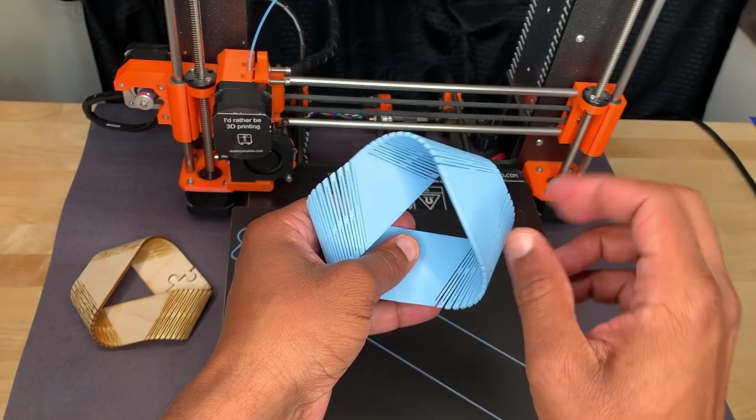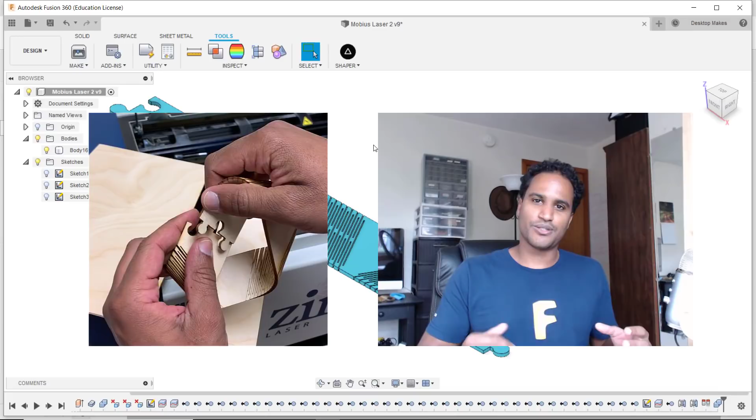In my last video, I showed how I used Fusion 360 to design living hinges, which allowed me to take a solid piece of plywood and bend it into this model of a mobius strip. Of course, the next obvious question is, can you do the same thing with a 3D printer? Can you 3D print this design and get the same results? Well, only one way to find out.

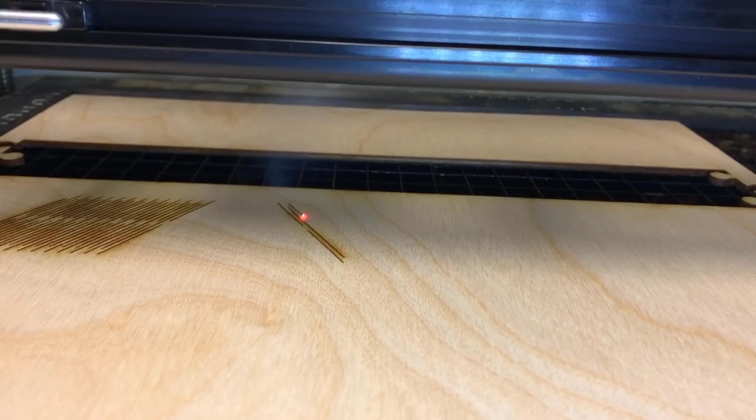To laser cut this, you need only a 2D file, right? I took my sketch and I just exported it and used the tool path to create my laser cuts. But to 3D print this, I had to go back in and extrude this to have, well, a 3D model. It's actually a little more complicated than just extruding it. I'm gonna go over in a minute all the steps that I used to get it from that 2D file to a 3D model that would be able to work with 3D printing.

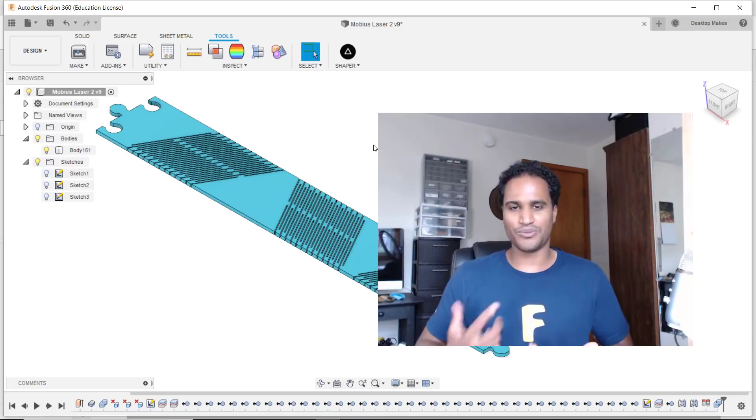In the process, I'm actually going to show quite a few tips and techniques in Fusion 360. So make sure to watch the tutorial. It's a little bit longer than what I've been doing, but I think it's well worth it.

Here's the sketch I started with, and if you want to see how I designed this, go ahead and check out last week's video. Right now we just have a 2D sketch, which was fine for laser cutting, but if we want to 3D print this, we're going to have to give it some thickness. There's actually a few steps we're going to need to take here, but we'll start with thickness.

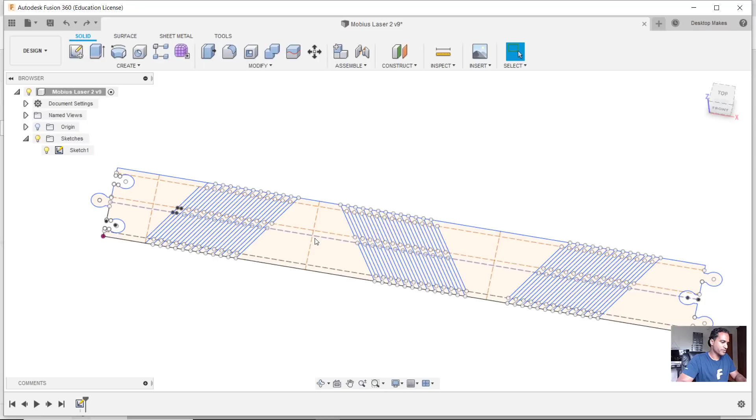So what I'll do is select this, go to Create, Extrude. So having selected that entire profile, I'm going to do a -2mm extrusion to extrude it down. That way my sketch lines stay on top there. So I'll click OK. And let's bring that sketch back into view.

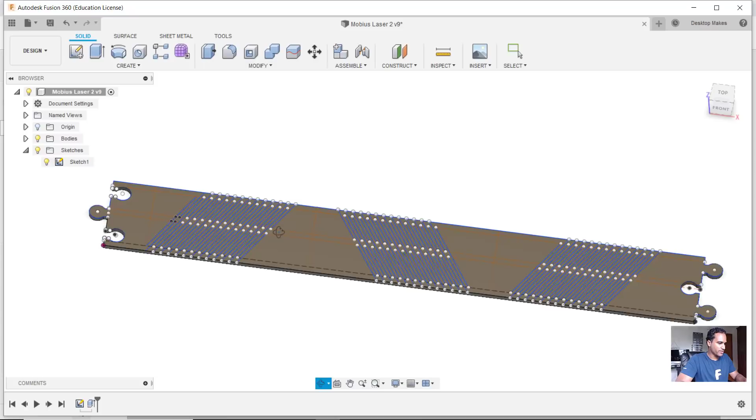All right, so now you see that I have just the solid thickness there. There's no cuts. So that's what we're gonna have to create. We're gonna have to take these lines here and have them cut through. Now, there's different ways we could go about this, but the way I choose to go about it was to go into the patch environment, which is now called the surfacing environment here.

And you can see, by the way, I'm using the new updated Fusion 360 user interface. If you haven't enabled yours yet, all you have to do is click on your name here, go to Preferences, and under Preview, just make sure that UI preview here is checked. I've been using it for a while now, and I believe soon Fusion is just going to make it default. But just in case you don't have it yet, that's how you're going to get the same sort of layout I have here.

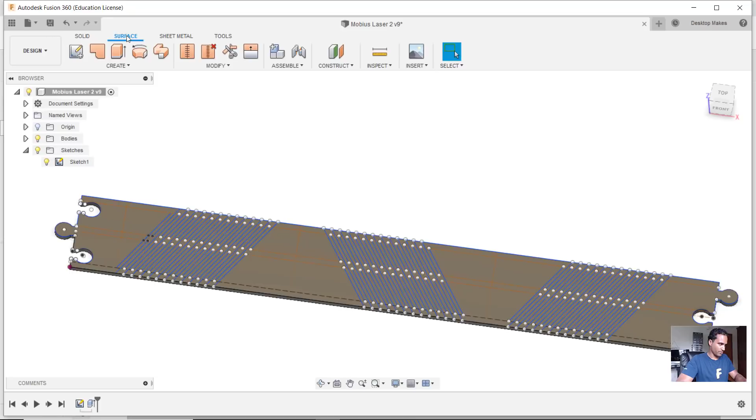So what used to be patch is now laid out into a tab here called surfacing, or surface. So if I click on surface, I'm going to select each one of these lines and go ahead and extrude them. Now, the reason I have to go into the surface workspace is because you can't extrude a line under the modeling environment, which would now be the solid tab here.

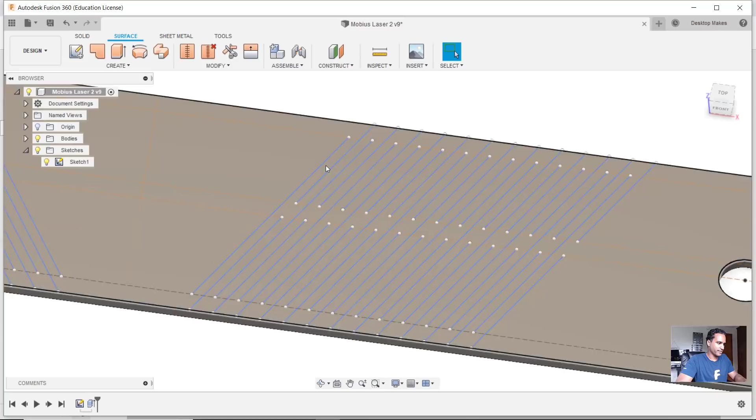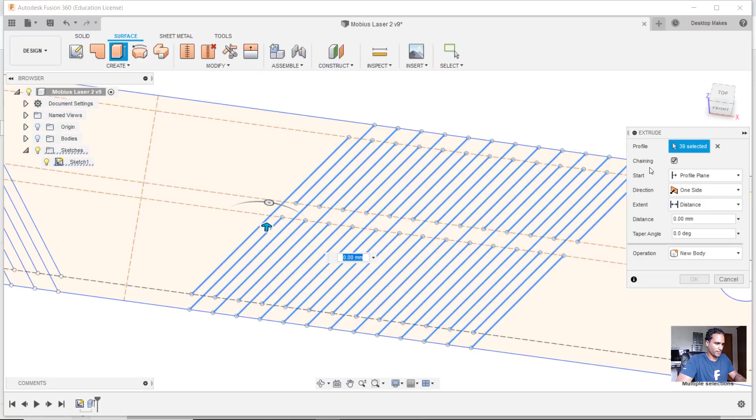So I'm going to go to surface, and then I'm going to select each one of these lines here. So let me get rid of bodies so we can see it a little better. And I'm going to hold Control. That way it'll allow me to multi-select. Okay, now that I have all of them selected, I'm going to go to Create and to Extrude, and I should see 39 selected. I'll bring bodies back into view, and I'm just gonna go all the way up.

I'll say 5mm. I just want to go all the way through, so as long as I'm going all the way through, it doesn't matter the distance. But I do want to go symmetric. I want to go both sides. So for direction, I'm going to choose symmetric. Operation is new body, and I'll click OK.

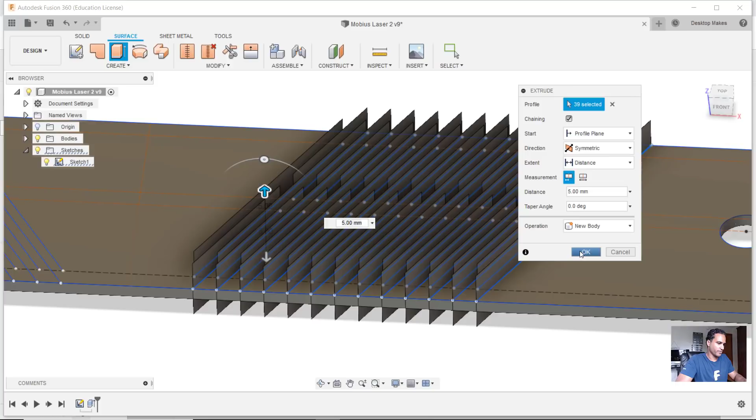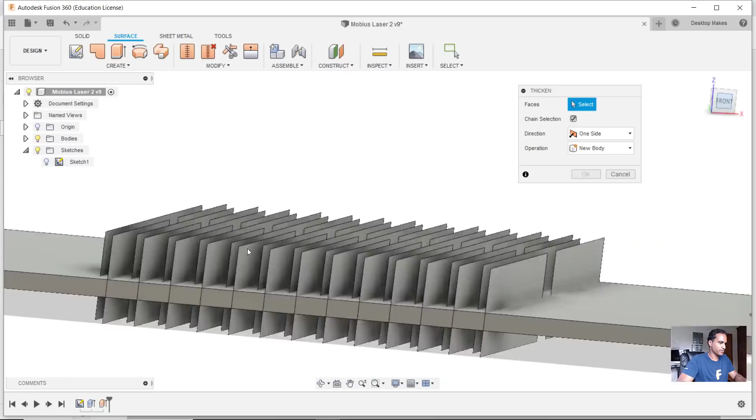All right, I'm going to untoggle sketches, and you'll see that I have these sort of flat, they don't really have any thickness. They're just these extruded lines that go through my model there. So next, let's go ahead and give them some thickness. So we'll go to Create and then down to Thicken. And I'll go ahead and navigate to a front view here. And I'm just going to select from right to left, and that'll select those surfaces there.

And for the thickness, this is basically how thick you want that cut to be. If you're laser cutting, it would be that kerf. In this case, I'm going to have it just do 0.5mm. So I'm going to type 0.5 here for the thickness.

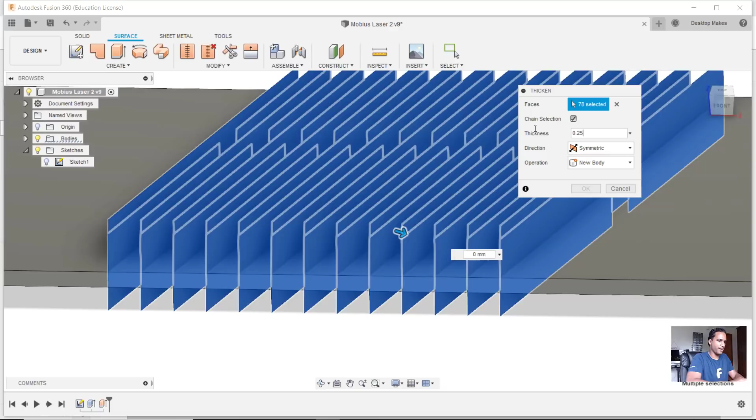And actually direction, I'm going to go symmetric, but I want it to be a total of 0.5. So I'm actually going to do 0.25. That way it'll go 0.25 in both directions, giving me a total of 0.5. Okay, I'll click OK. And now you can see these have thicknesses on them.

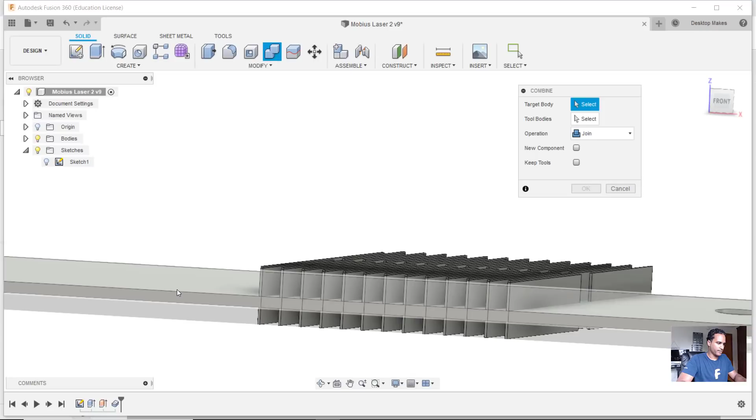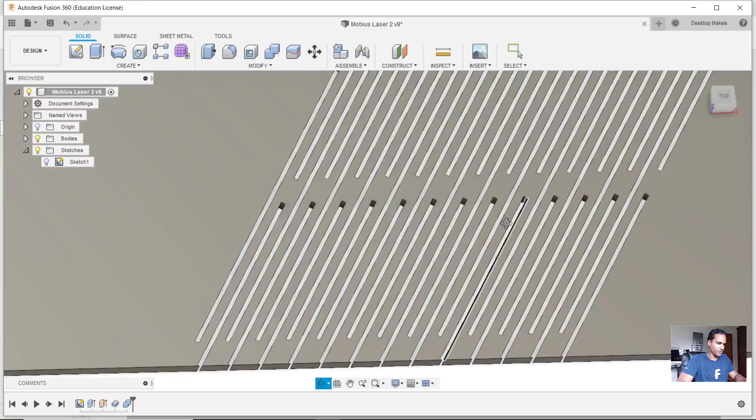So next I'm gonna do a cut. So let's go back to solid, and I'm gonna go to modify, combine, and my target body is gonna be my main body here, and my tool body is gonna be each one of these new bodies that I created here. So I'm just gonna drag, select them, and operation is going to be cut, and then I'll click OK, and now you can see I have those holes there.

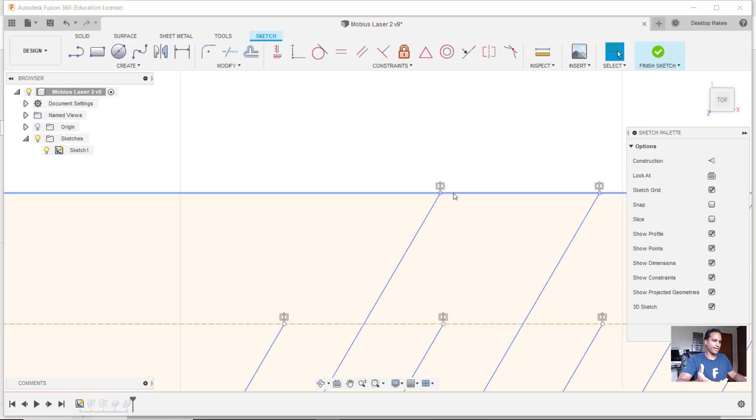Now there is a problem. I realized this afterwards, that because the lines didn't go all the way through, they kind of leave this little piece here. So in hindsight, what I should have done is, let me show this sketch right here. I should have made these lines just go all the way through instead of snapping them to the edge there. That way, if I was to do this again, I wouldn't have to go in and clean up these edges here, because it would have just automatically gone to the extent of the line had I gone all the way through.

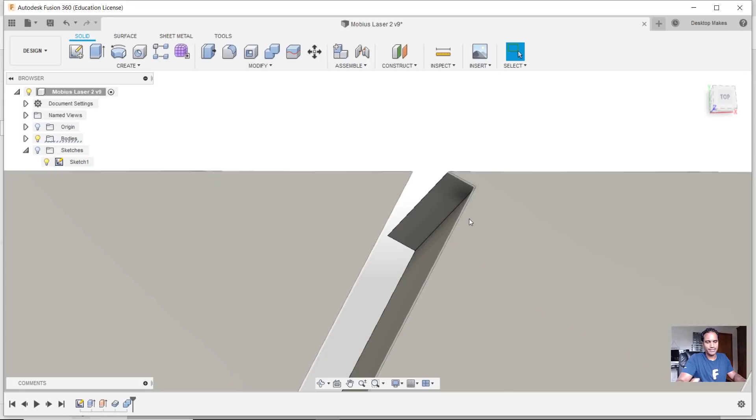All right, but no problem. We're just going to clean that up here. And I can select each one of these and try to extrude them out. But the nice thing with Fusion 360 is the delete tool, or the delete key, actually really comes in handy. It does a really great job of healing surfaces, and in this case it's just easier to do. So what I'm going to do is just click on that surface and then just hit delete on my keyboard, and see how it just knows what I want done and just cleans that up. So in this case it just deletes everything.

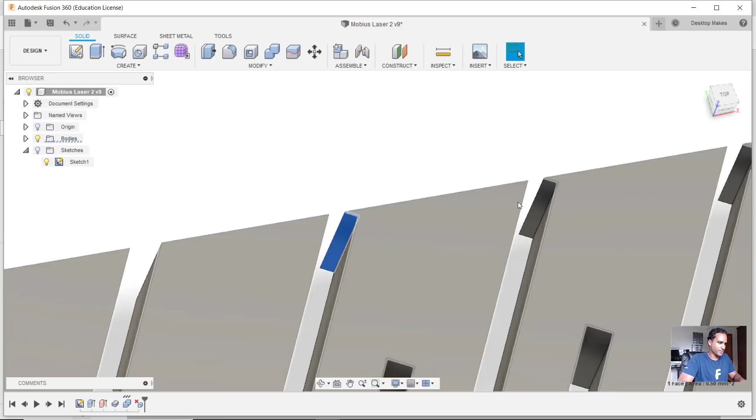So let's go ahead, and I'm just going to hold Control and select each one of these. All right, and then just one keystroke deletes them all, and let's do the same thing for the bottom. All right, got them all selected, hit delete, and that cleans up the top and the bottom.

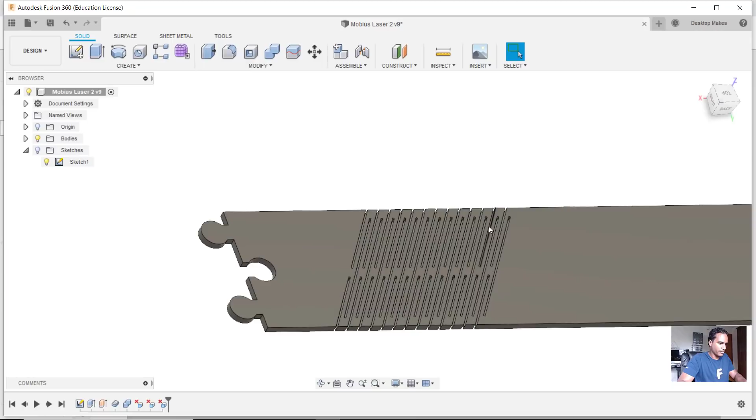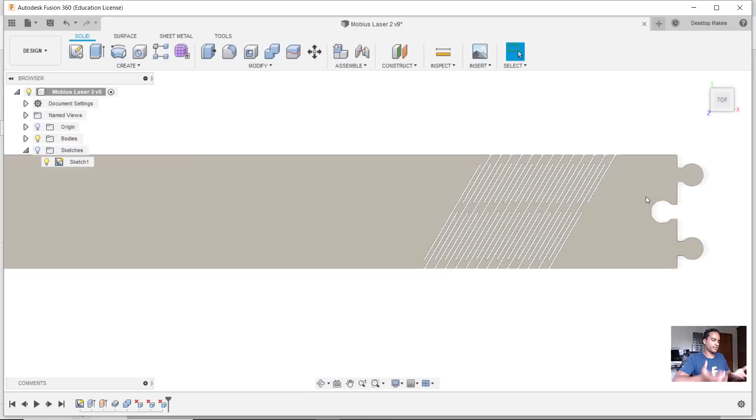All right, so now what I'm going to do is I'm just going to take this section here. So this part, I really want this repeated 3 times. And instead of doing a pattern, I'm gonna cut this off and make it its own little body, and I'm gonna do a mirror. So I'm actually gonna mirror it 3 times. So to make that cut, I'll create a sketch on this surface, and I'm gonna draw a line. Let's get rid of sketch 1 here, we don't need to see it.

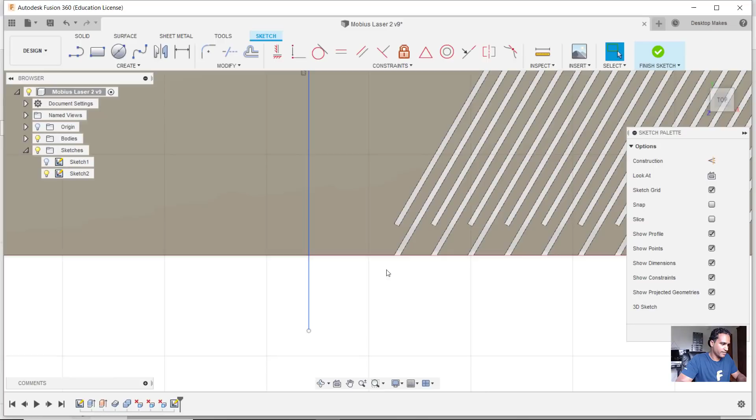So I'm gonna go to create, and I'm gonna draw a line going straight down, making sure it is vertical, and I'm gonna position that line at 5 millimeters from this point here. So let's project that point in. I'm gonna hit P for project and just bring that in. Okay, now I'll hit D for dimension, and dimension this line to be 5 millimeters from that point.

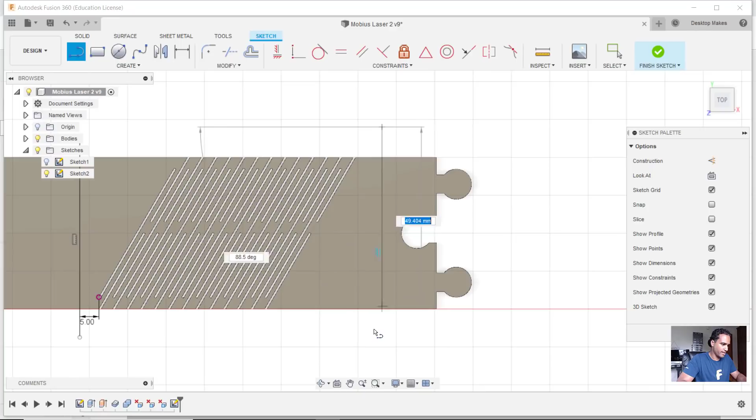I'm gonna do the same thing on this side. I'm just gonna draw a line straight down, and this point here I'll project by hitting P, selecting it, click OK, and then D for dimension, and I'm going to dimension the line from that point to be 5 millimeters. Click Finish Sketch.

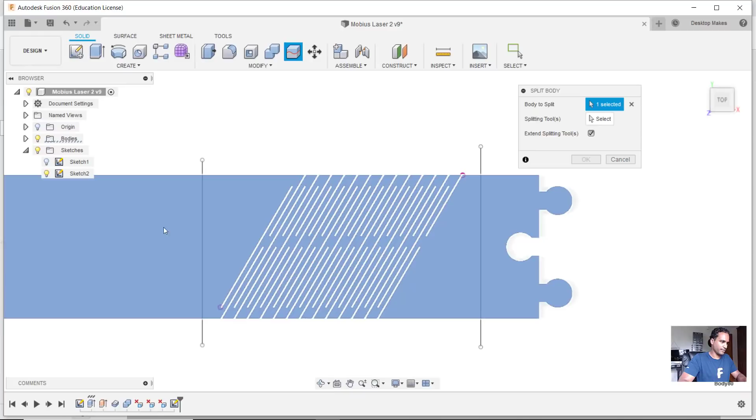Let's bring that sketch back into view, and then we're going to go to Modify. We'll go to Split Body. Select this body, and then our splitting tool is going to be this line here. Click OK. And I'm going to right click and just repeat that process.

Let's bring that sketch again. Notice you have to keep sometimes bringing the sketch into view after you create an operation. Fusion will just untoggle the visibility of the sketch. That's why I have to keep bringing it back into view. All right, we're going to repeat that process here. Body to split is this body. Splitting tool is going to be this line, and then I'll click OK.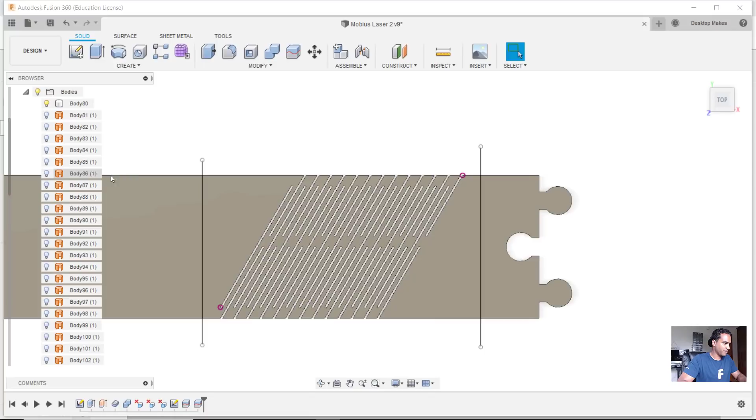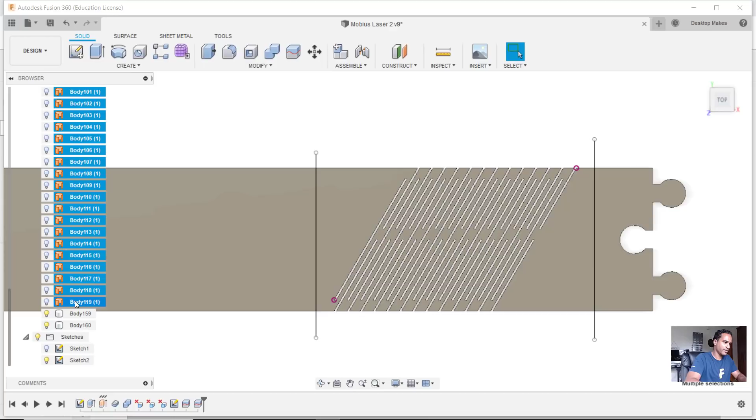And now if I expand bodies, we see that we have the representation for body as this cylinder here. But then we have all these surfaces, and then a couple more bodies here. I don't need to see all these surfaces, so I'll click the first one, scroll down, shift-click the last one here, right click and go to remove.

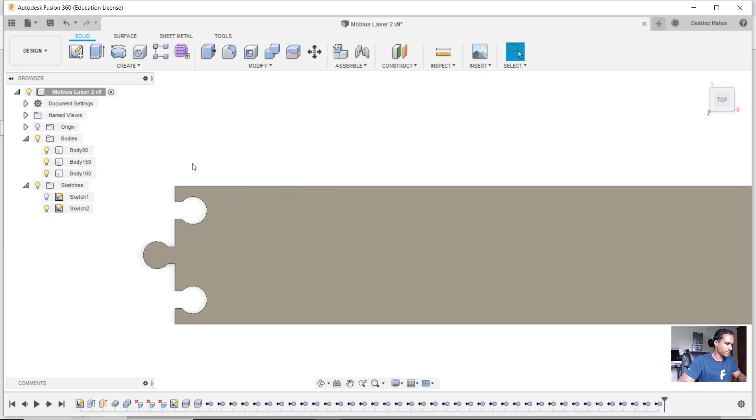Now I have a few bodies here. I have this edge, that little puzzle piece, this big part, and the body I just separated. I want to delete most of this in the middle, but save this little puzzle piece. So let's create another sketch here.

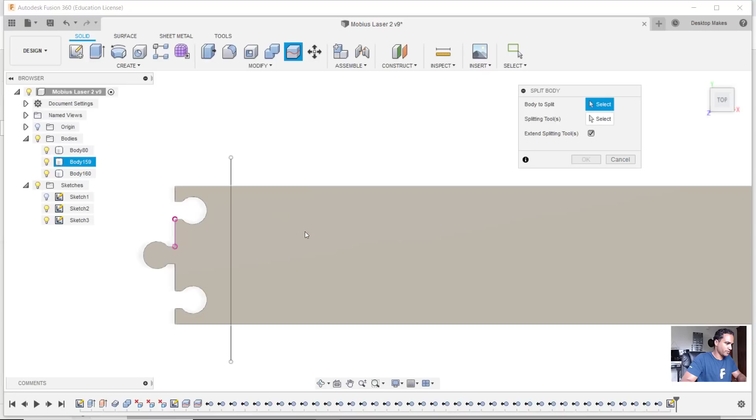I'm going to do the same process where I bring a line in, and dimension this line from this edge here, making it 16 millimeters. Now let's use that line to split this body. We'll go to modify, split body, choose our body, choose our splitting tool, and click OK.

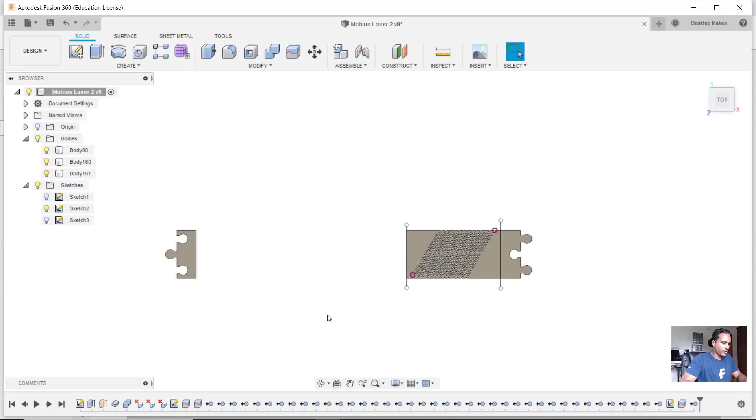Now I have this body here, which I don't need anymore. So I'm going to right click here. Notice when I select it, it has a little hash underline telling me which body it is on the browser. I'll right click and go to remove there as well. Once I remove this sketch, that leaves me with these 3 bodies here.

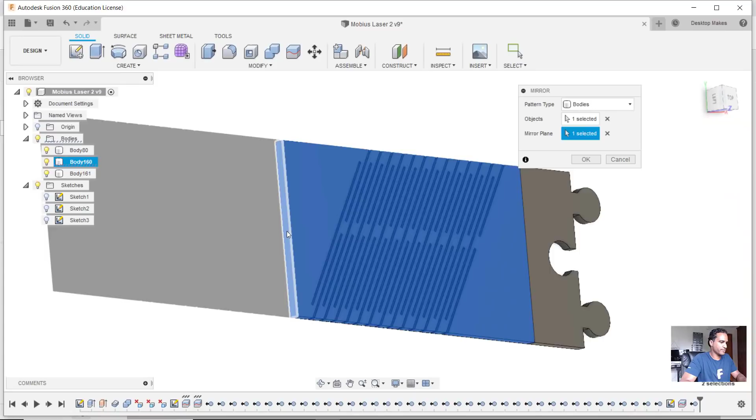So I'm gonna take this body here now and mirror it. I'll go to create, down to mirror. My pattern type is going to be bodies. I'll select it, and my mirror plane is going to be this surface here, that edge surface, and click OK. We can see that's mirrored, and we're gonna repeat that mirror process.

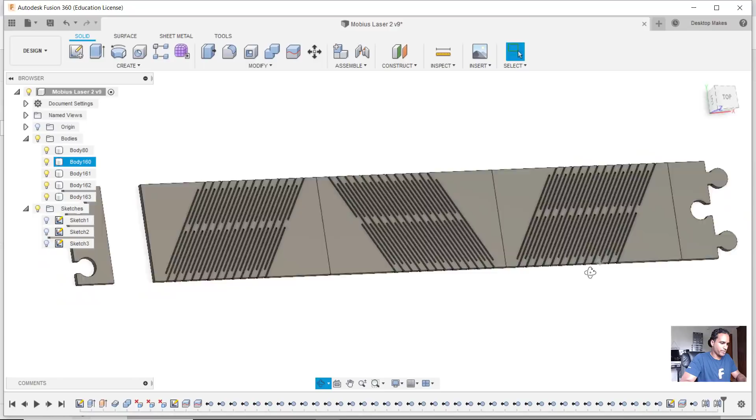I'm gonna select this body. Again, make sure pattern type is bodies, and then my mirror plane is going to be this face there, and then click OK. Now I have those 3 cutouts here, those 3 sections mirrored, and I just need to bring this part here to align with this section.

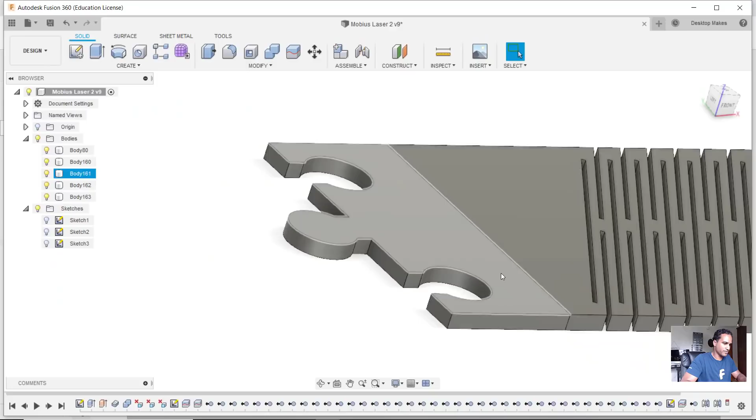To do that, we're going to use the align tool. I'll go to modify, down to align. I'll select this center point there, and then this center point here, and that's going to bring that right into place. And there is my 3D printable mobius strip.

Right now it's in separate bodies. We've got 1, 2, 3, 4 bodies as shown here. Actually I'm showing 5 bodies. 1, 2, 3, 4, 5. Yeah, 5 bodies. So the final thing we need to do is combine them all.

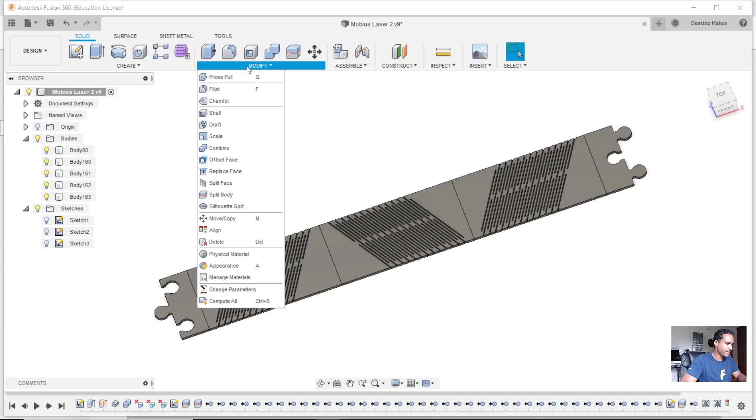We'll go to modify, down to combine. I'll select one of them as my target body, and in my tool bodies I'll select the rest, making sure I change the operation here to join. Click OK, and you see everything is now one body.

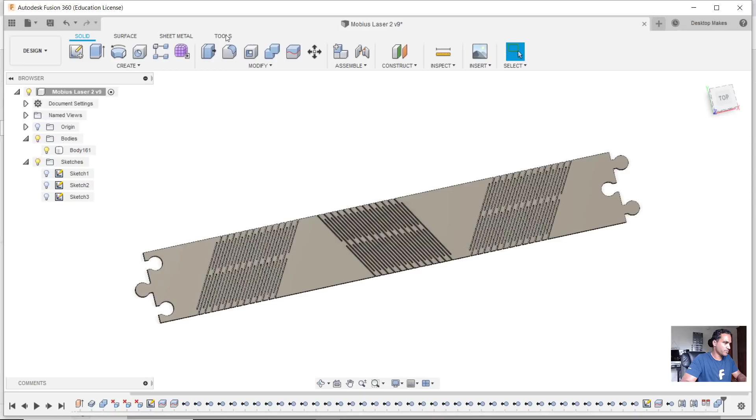Now it's ready to be 3D printed. So all I have to do is go to tools, go to make, and select this body here. I'll send this to Simplify3D, so I'll click OK.

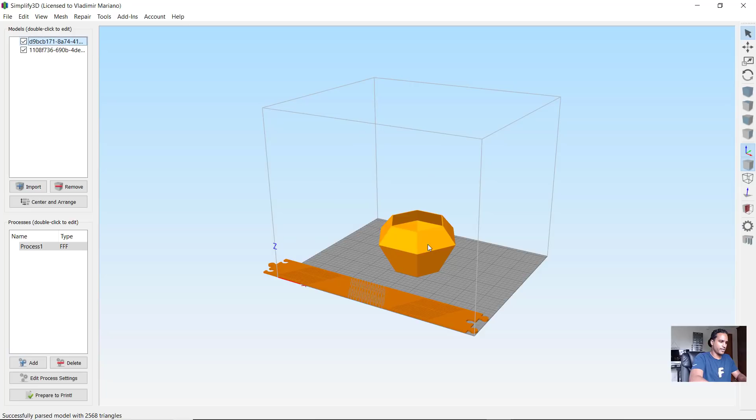You can choose any slicer. It tells me it cannot auto arrange. I'll just click OK anyway, and delete my last model that's there. Double click on this model, and the way to get it to fit, because it's so long, I actually have to position it diagonally. I can click here to move this, and then click the little rotation tool here to get it aligned in the middle.

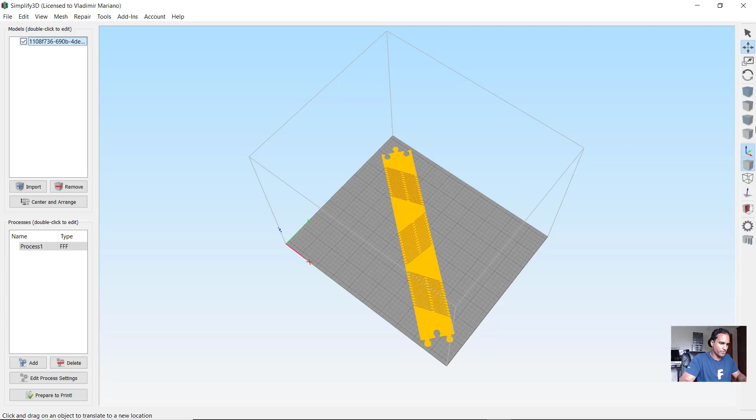So anywhere around here, let's go to a top view so I can see it better. Maybe a little more rotation. Okay, that'll do it. So I'll print this just using PLA, and if you want to see my settings, I went with just 0.2 millimeter layer height here.

So that was it. That's how I went from a 2D sketch, making this a 3D model to be able to 3D print instead of laser cut.